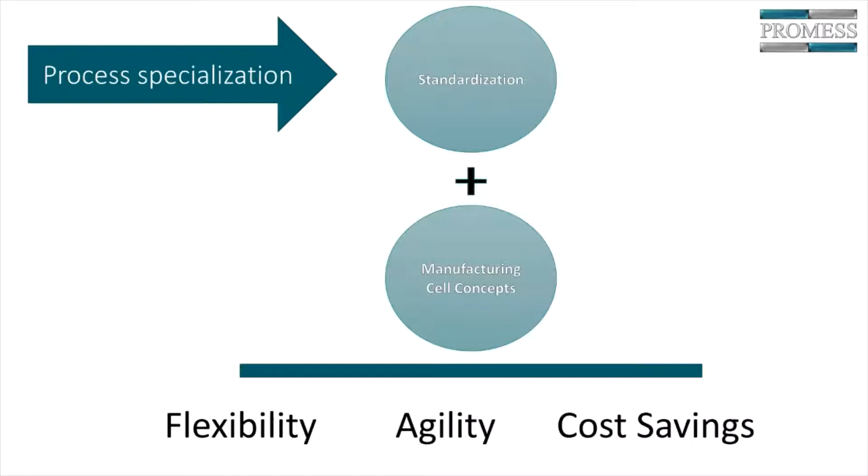Stephanie and I were talking about this, and we were talking about specialization. I'm one of these old guys who's been around a long time - I've been in this industry now for about 33 years. When I first started out, I was in the machining industry.

But we started talking about it, which made me think about a lecture I had from a professor named Leonard Peikoff. It was a lecture on Aristotle, talking about what a universal genius he was - a philosopher, mathematician, and inventor. Back in his day, they just called him the philosopher. Then you had Michelangelo and Leonardo da Vinci - sculptors and artists and mathematicians and inventors. They really were universal geniuses.

One of the students in that lecture asked, why is there no longer any universal geniuses? Why don't you see that? And Leonard Peikoff answered it very simply. He said the depth of knowledge is so broad and so deep in each subject that it's impossible nowadays to be a universal genius. His advice to this young student was to become a genius or an expert in one subject - that's difficult enough.

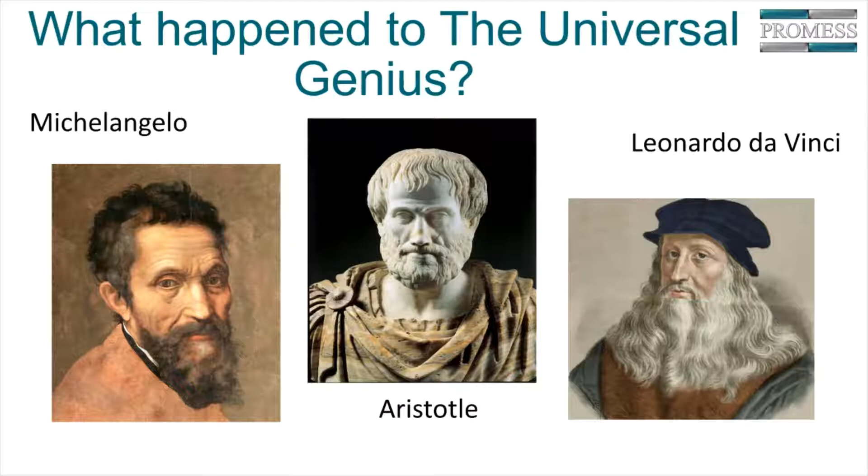And this analogy fits really well. I remember back in the late 80s, early 90s, a lot of machine builders were really expert in a lot of things, but slowly that has gone away because the technology has become so deep. We don't even call them builders anymore - most of the time now they're referred to as integrators. They're basically taking specialized technology and integrating it.

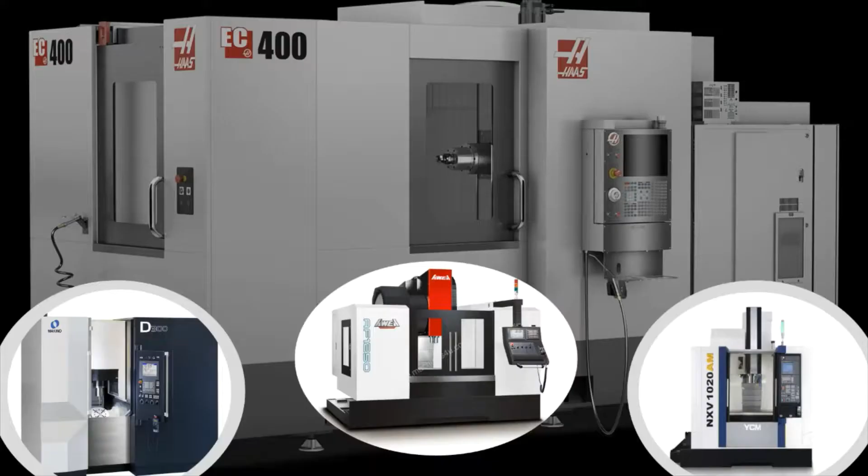That's true. And so with the advanced techniques, advanced controllers, advanced data requirements and so on, a lot of these technologies are being worked on as specializations by different companies. Again, I came from the machining industry early on, and in that industry, that story is to a large extent over.

When I was first working in the machining industry, there were a lot of custom machines, transfer lines, dial machines. You would have a part to make, and a machine builder would create a transfer line or dial machine that would make 2,000 parts a shift, with really high quality and work really well. But when flexibility and other things were needed, machining centers started to come on the scene and were being used more and more.

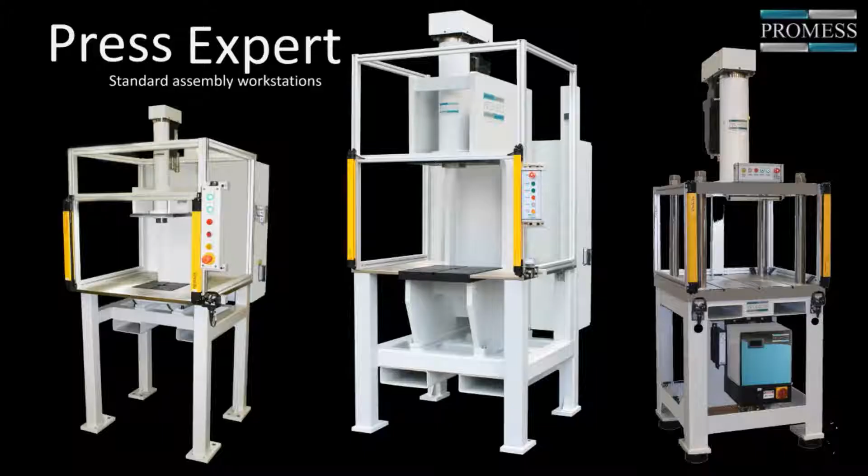Now I'm a little bit out of that industry - I work more in the assembly industry now than the machining area - but I don't know a manufacturer of machining lines anymore. I can't think of any; it used to be Lamb, Huller Hille, Cross, and all these guys. Machining centers and standard equipment have taken over. So in the machining industry, it's really gone that direction, and in the assembly industry, we're moving that way too. Promess is a manufacturer of servo electric presses - we've been doing this for about 30 years.

We have quite a number of standard solutions, but more and more we're supplying workstations or press modules, and we have a variety of them, both for press and torque. These modules can be tooled up to do a lot of applications. We go down from ounces to hundreds of thousands of pounds, but it's moving in that specialization direction that we've already seen with machining centers in the machining environment.

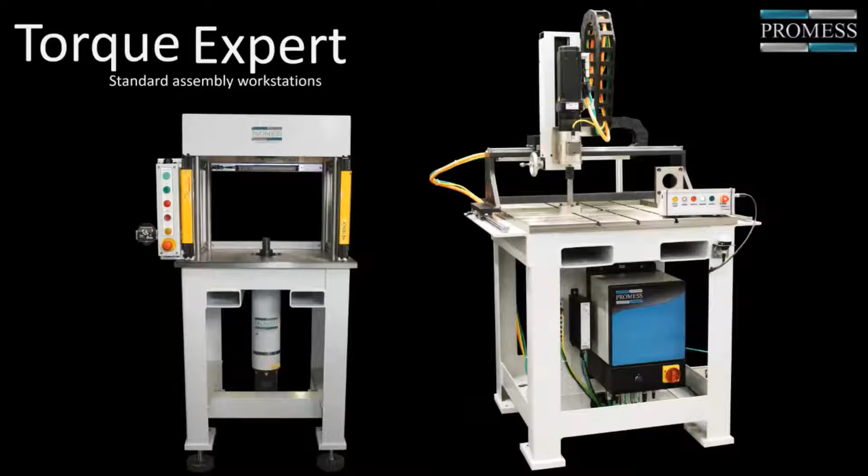The technology moves so quickly, it's difficult to keep up on everything that goes into an assembly process. You have special software, special data acquisition, the interfaces, what do you do with the data, and just the knowledge of the machines, the controls, and the process has gotten so deep.

Promess also does torquing. What we're really good at is assembly presses and torque testing systems, and that is our expertise. So we're coming up with standard solutions, but we're not the only ones.

We have an example here of leak testing. There's a company, we're friends with them, CTS, Cincinnati Test Systems, and they do a variety of things, but leak testing is what they do very, very well. They have some standard solutions for leak testing.

We do work with, we're involved in lines with companies that do other types of fastening and forming and orbital forming and welding, and it's the same story. They're standardizing their equipment more and more.

It's the 80-20 rule. Whoever came up with the 80-20 rule was a genius. It applies so often, and I think it fits here. 20% of applications may need something exotic where they need a custom station or custom machine built. But about 80% of the time, you can take a standard machine and tool it up. Your tooling and your fixturing and stuff is special, but the machine itself can be standard.

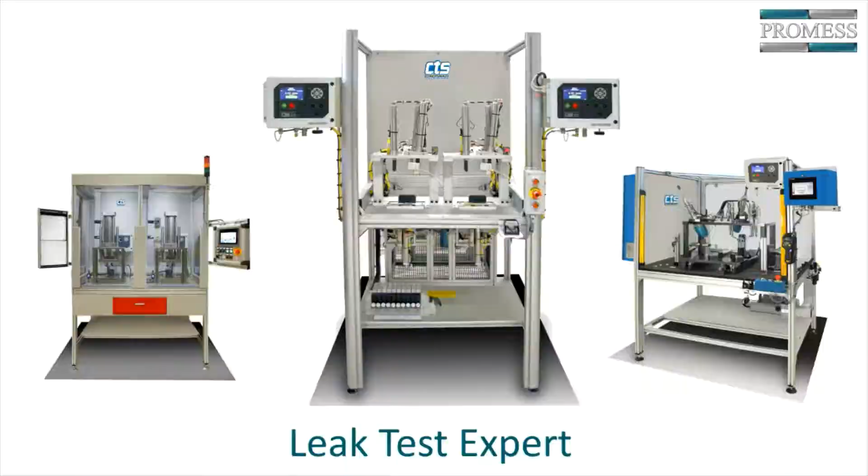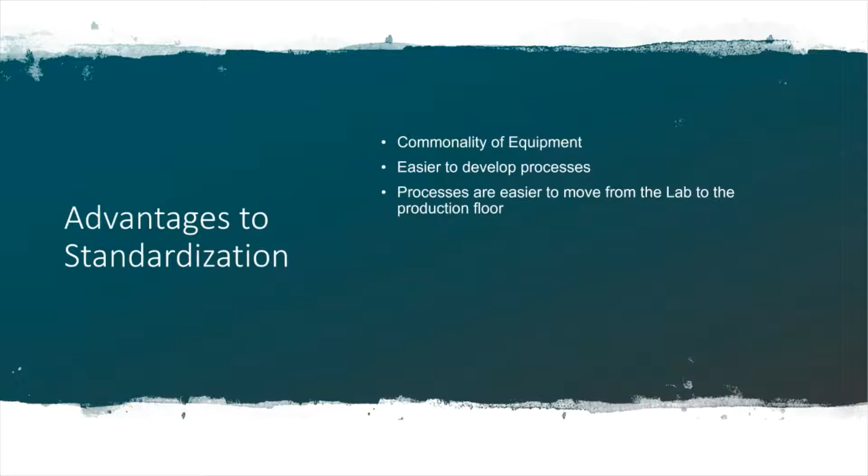Right, and there's a good reason for that, when we talk about all the advantages. Commonality of equipment, of course, makes it easier to develop processes. The processes are easier to move from the lab to the production floor. If you're using standard equipment in your pre-production lab, you can move it to the production floor much easier, and equipment lead time is shorter.

Repurposing stations is easier. That's one of the crazy things. In the old days, going back to the machining analogy, you would have a transfer line or a dial machine that was built to make a specific part or a specific family of parts. And when those parts were at end of life, that was a whole other problem, which we're going to talk about. But the transfer line was ultimately scrapped normally. When they switched the machining to machining centers, those machines are utilized again.

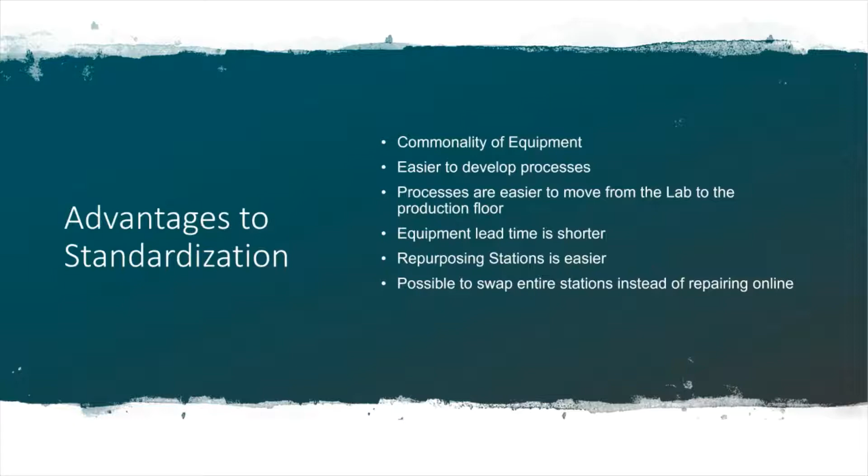They're repurposed, and it's a huge advantage to using standard equipment. It's possible to swap entire stations instead of repairing online. New part models can be more fully debugged in the lab. Again, if your lab equipment matches your production equipment, the transition from pre-production lab to production is much smoother, and low volume production can be done in a lab or in a smaller environment.

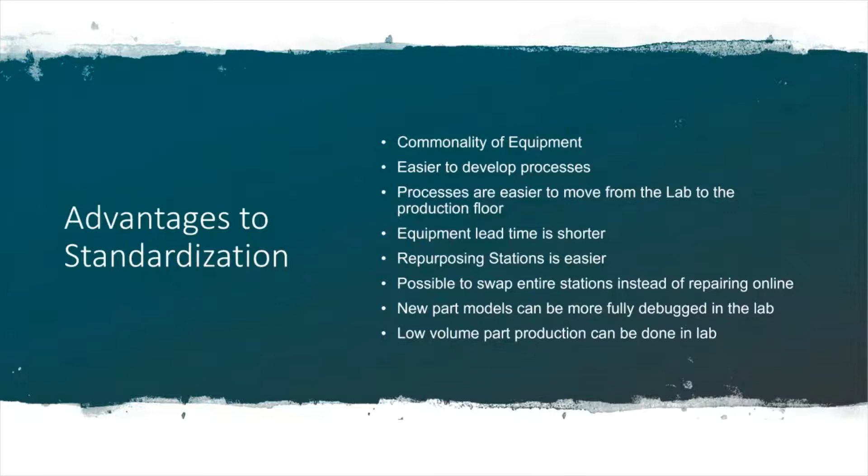So our main subject today is the trend towards specialization, the trend towards standardization, which we think is driven by specialization. We are going to be mixing in the assembly cell concept because the two go together so well, so we're going to be talking a lot about that.

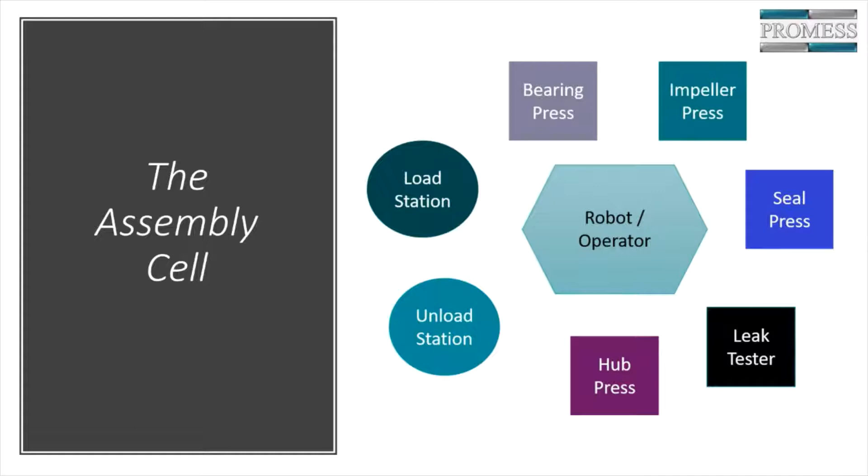Using a manufacturing cell concept, you have reduced setup time. Coincidentally, standardization gives you the same exact advantage. Improved machine utilization, ramping production up and down is easier. Station repairs are easier and don't take production completely down, and it can make downsizing production and down to service parts easier too. All 5 of these are an advantage.

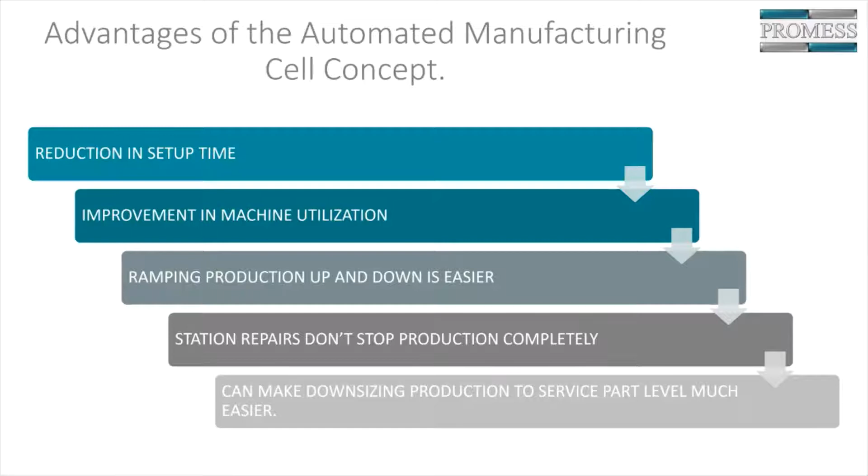This is just a partial list of the advantages of the manufacturing cell concept, but all 5 are also with standardization. That's the reason why a lot of people have gone to manufacturing cells, because you have so many of the common benefits as in standardization, which is why we're firm believers that when you combine the two, you're really looking at the best of both worlds. You end up with a very powerful, agile, flexible setup, and you save money in the long run for sure.

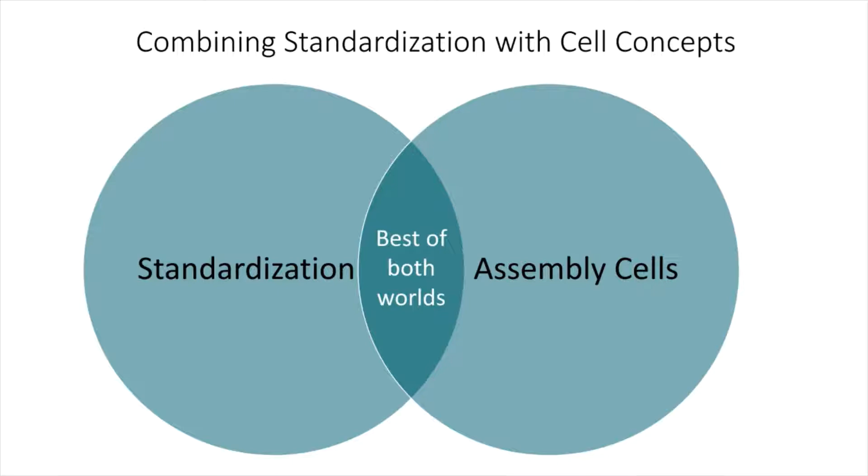Standardization can happen without the assembly cell, but we're strong believers that the combination of the two is really powerful. So to really bring that home, we wanted to look at an example of a water pump assembly. What we're going to do is compare and contrast a traditional transfer line with custom stations versus an assembly cell with standard stations.

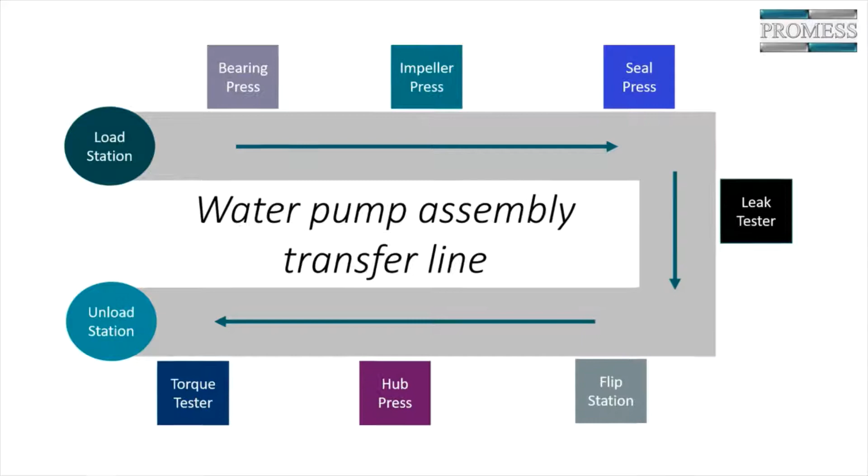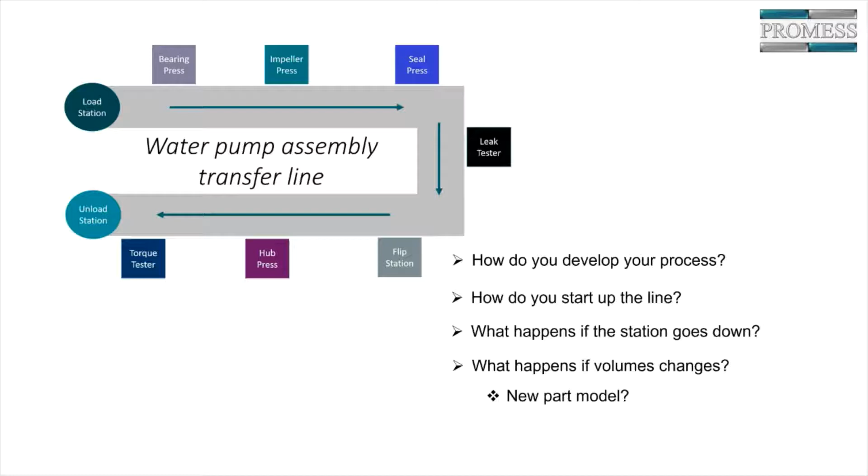A few things we're going to look at: how do you develop your process, and how is the development different between the transfer line and the assembly cell? What's it like when you start up the line? There's really a difference between the two. And what line hasn't had a station go down? What about when your volumes change up or down, you get a new part model, how do you handle that? And of course, service parts—there's a big difference between those two.

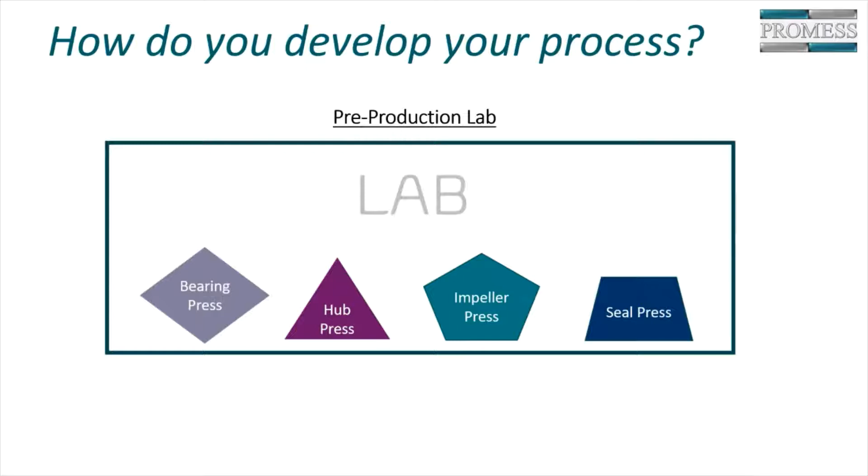So let's start with developing your process. With a traditional transfer line, hard automation, most of the time the development's done in a pre-production lab. But very distinctly, the equipment used in that lab is quite different than the equipment used on the line. This is where you run into a lot of problems.

If you spend a lot of time going from different plants, which I did for 25 years, some of the labs are fairly well equipped, generally not with the same equipment they're using out on the production floor though. So any of the development doesn't translate directly. You can figure out a lot of things, but you can't figure it out 100%.

Some of the pre-production labs are using World War II vintage equipment and arbor presses. On the production equipment, they're going to use an electric press, and in their lab they're doing their testing with an arbor press. It's very difficult to really prove out a process that way.

And the problem with that is that to prove out the process, you're not going to get to do that until the transfer line is completely built. That takes time and energy. Many times we even find out that the components aren't sized properly, so you have a press or unit that's too small for the application.

Or how often have you been working on a project and the machine is built, you're running cycles, you're getting a 30-second cycle time, and they expected 20 seconds, so you try to figure out how to get 10 more seconds out of it—because it was never actually debugged on production-type equipment. The cycle time wasn't thought through during that part of the process. You're using best guess at that point.

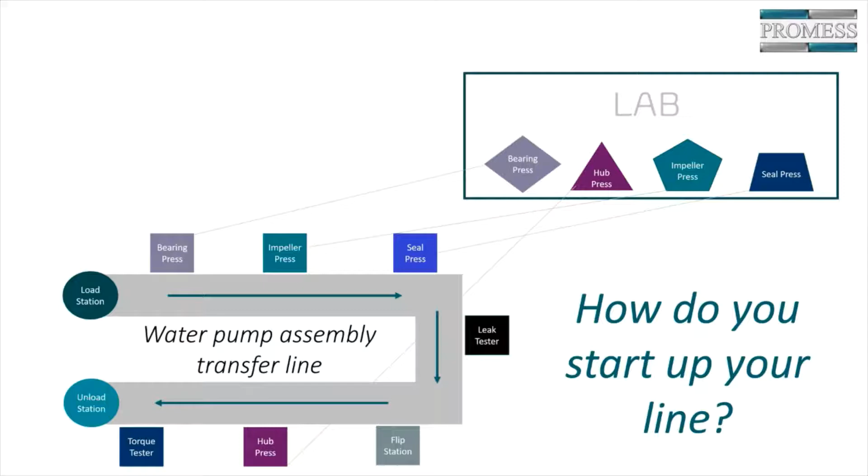So we're also part of our advocacy here for the pre-production lab guys—we're on your side. You need to have the standard equipment which is used in the manufacturing area in the lab.

Once you are using that equipment in the lab, most of your process is debugged in that pre-production lab. You're familiar, you know you have the right-sized equipment. So once you get that cell to your floor, you have very little process development that needs to be done after that.

It's apples to apples. If your lab equipment matches your production floor equipment, it'll slide right in. You can develop the processes really 100% before the production equipment is built.

Any transfer line or dial machine I've ever worked on, the final process development is either done on the builder's floor in a rush because the machine's late, or the machine is shipped and then it's done on the end user's floor. But now your station is all debugged, it's ready, it's on your floor—but guess what?

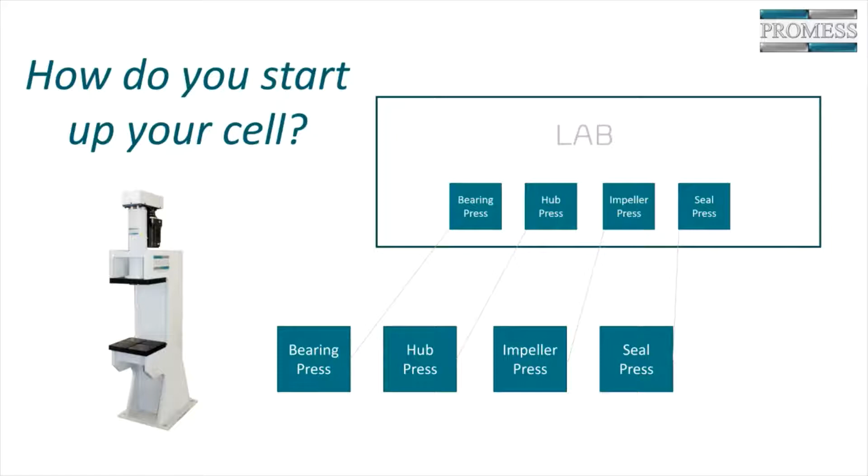One of them went down. Your whole line here is only as strong as your weakest link. And right now, according to this example, your bearing press is down.

A custom station means specialized knowledge. So if not every person on your maintenance team understands that specific station, you either have to wait until that person comes in, or try to find another way to take care of this. But right now, because this is all linear, nothing on this transfer line is running—every station is down, every station behind that station, or ahead of that station.

Is that behind or ahead? After that station—I'll use the word after.

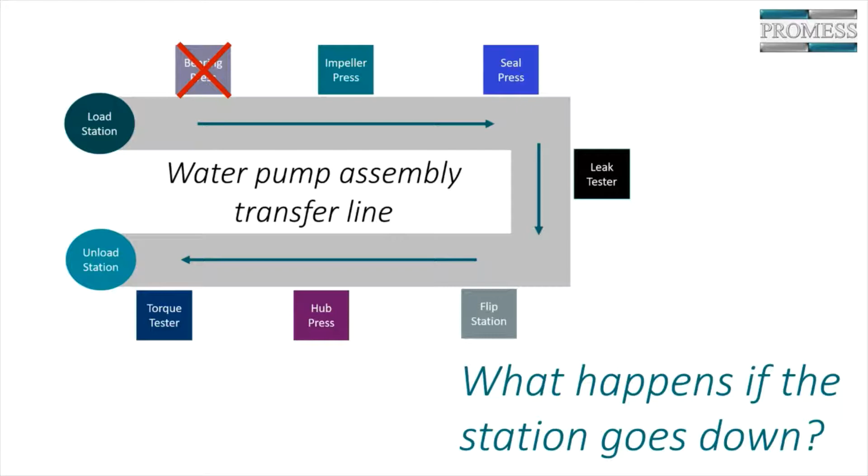When you look at an assembly cell that's using standard equipment, because it's standard equipment, there's more common knowledge and shorter downtime. The actual repair should be quicker. And the other thing with standardized equipment is generally it's simpler. The idea is to have a simpler station rather than a very complex custom station, so it should be able to be brought up a lot quicker.

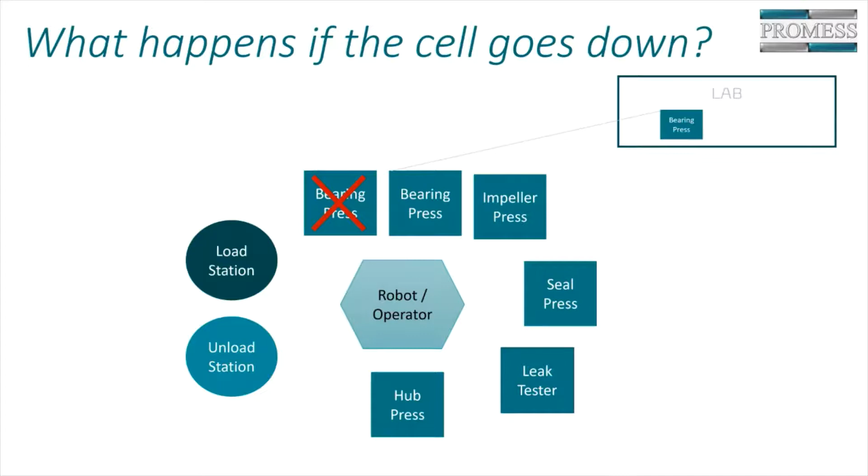You also have standard spare parts, so you don't have to keep a ton of specialized spare parts. You could potentially have a whole spare station. So if a station needs to be rebuilt or something's going on with it where it's going to take a few days, you can forklift in a complete new station, swap the tooling over, swap the programs, and you're up and running. Right, which is ideal.

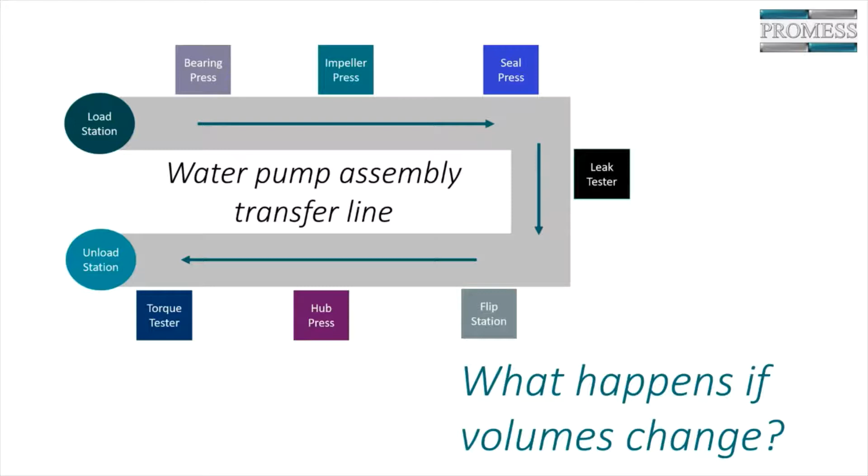Then there's the volume changes. We know this happens in the field. This line, for instance, is designed to run 2,000 parts a day, but now you need 2,500 parts a day. Floor space is a premium, and adding a new transfer line for just 500 additional parts isn't economical. It's not a simple thing to do.

Generally you have one or two bottleneck stations. 75% of your stations could do 2,500 parts a day, but maybe the bearing press can't. So you can add a second bearing press station in, but on hard automation it's not an easy task to add in a station. Where if you have a cell, you just drop in another station.

So on this example, if we were trying to add the bearing press because we want to increase production, we have to take the whole line down. Well, that's illogical. We're trying to increase it, not decrease.

With the assembly cell, we can just simply add the bottleneck station right here and then change slightly the robot so that it knows to use both stations, and then you can get up and running. In the meantime, you're still using the original station. You can prepare that new station offline, wheel it in, and it takes a half a day to get that station up and running because you've got it all set up offline.

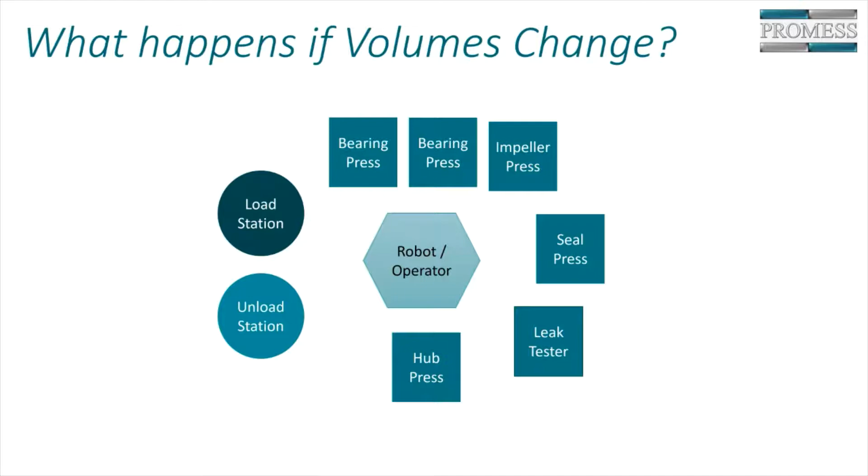And then if you do need to double the amount of production that you have, you can add another cell. These cells tend to be smaller in size and take up less floor space than the traditional transfer line.

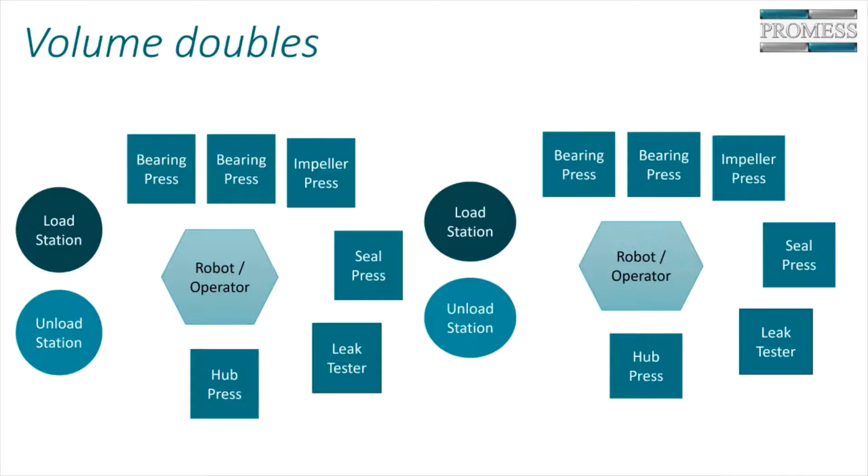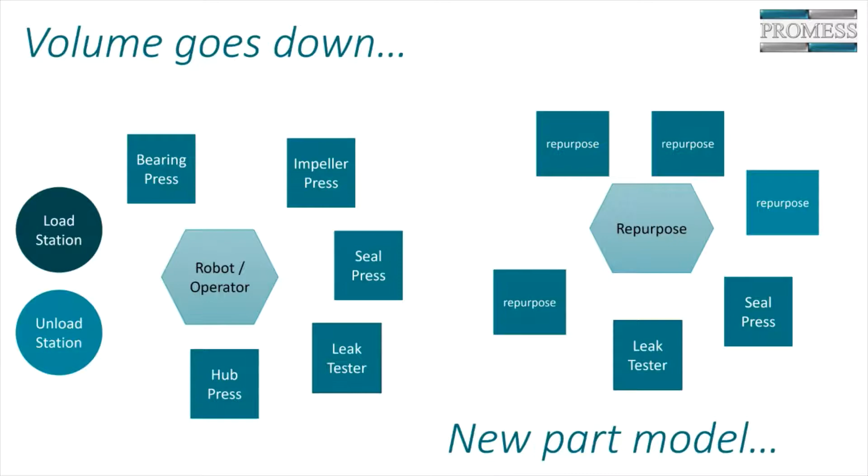If your volume goes down, now that second cell you had, you can repurpose for either a new part model or spare parts for a different station. It's back to the machining center analogy: you bring in machining centers if you need more production, and when you don't need them anymore, you take them off. You're making water pumps and your water pump production's going down, but your compressor production's going up, so you move the equipment over to the compressor production area. And then if you no longer need the bottleneck station, you can remove that one as well.

One thing with the whole ramping up and down, there's a life cycle to a part. You build a machine that can do 2,000 parts a day, but you really only need 500 parts a day in the beginning, and you've got to get this whole line up and running so you can do 500 parts a day. Usually the machine is limping along getting 500 parts a day off of it, and you're working at it because it can't do 2,000 yet. Over a period of time you got to get it up to 2,000, and then hopefully your business takes off and you need 2,500 or 3,000, and now you've got work to do to get there.

But as the production changes, a new model comes out or something, you need to start ramping down. On a transfer line, if you only need to make 1,000 parts a day, you still got to keep that whole transfer line maintained and up and running even though it can do 2,000 parts a day. But with the cell technology, with standardized equipment, downsizing is easy, and you're saving a lot of floor space. The real big problem is that part is totally out of normal production, and now you're going to service parts—how do you handle that?

Right, and we have customers who have kept a line on their floor, taking up space simply to run 500 parts a month. We've worked with customers where they call us and tell us, we run this machine 2 days a month, and I don't want to put money into it, but it's down. Do you have some used equipment? Do you have a used controller?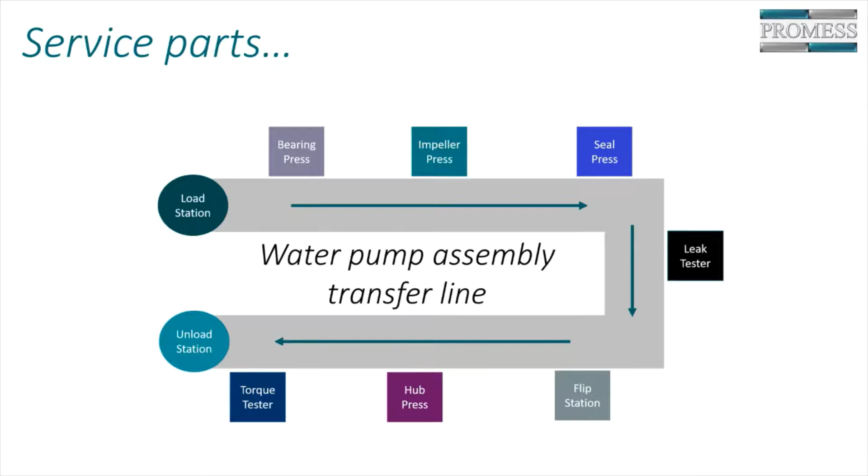Because they're keeping a transfer line that is old up and running to run it 2 days a month. Right, and floor space is valuable. Floor space is money, and you have to wonder, is that floor space they're using economical? Very often they'll outsource the service parts. They'll find a company that will build their service parts, but they ship that company the entire transfer line or the entire piece of equipment, again designed to make 2,000 parts a day because they need to make 500 parts a week on it.

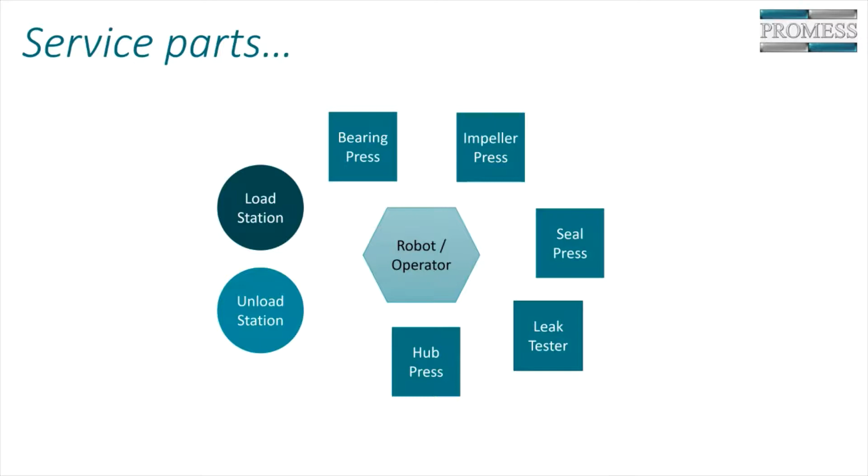So let's look at what we could do using an assembly cell and standard parts. Okay, so here's our assembly cell, and now we just need to service the parts. You can break that cell up. You can repurpose a majority of that cell and just take the 2 stations that are needed.

Since you're using standard equipment, and this is really low volume, you could set up and have your seal press be tooled up to run your bearings, then change the tooling and have it run the whole process all the way through. You only need 1 press station to run all 4 press operations because it's so low volume. You tool it up, run 500 parts of one, run 2,000 parts of whatever, and swap it around. And we have many customers that do this. This is not unusual.

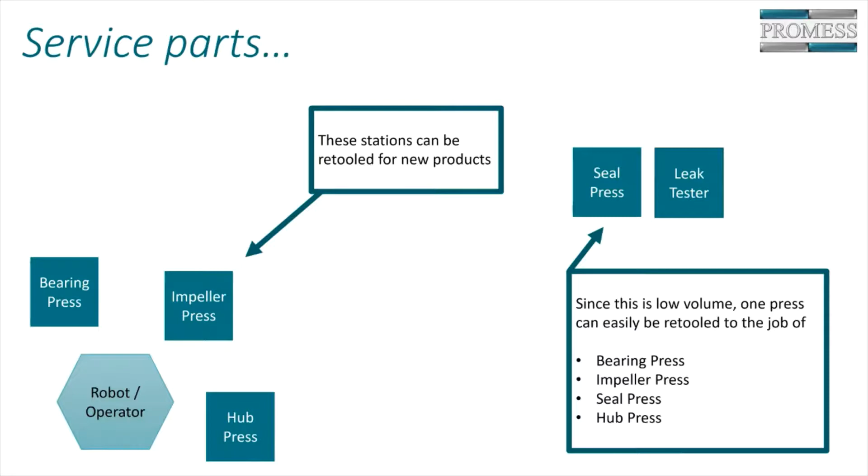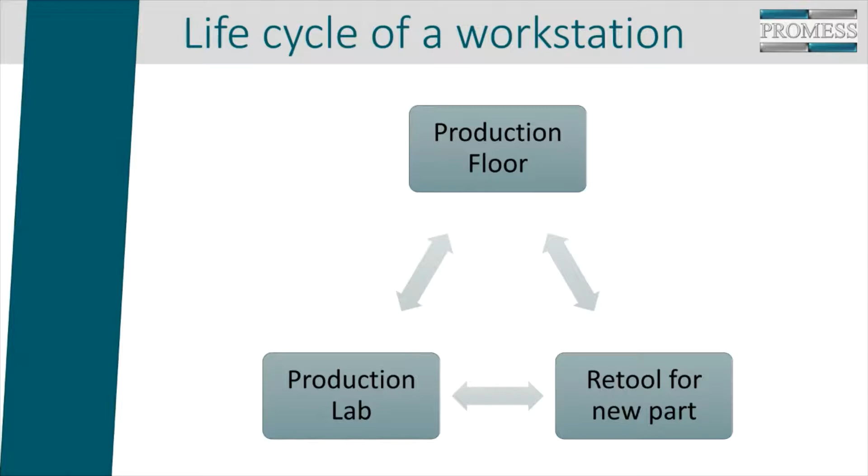And that's really, we're talking here, but if you look at the life cycle of a standardized workstation like this, it can go from the production floor to the production lab. It can retool for a new part. It just has a lot of flexibility and agility. And we can speak about this because we do this every day.

At Promess, we have what we call our PDC, or Process Development Center, and we have our standard equipment. Rarely a day goes by that we don't have someone send us parts, or they bring in parts. They'll bring in some tooling, or we'll put something together for them, and it takes anywhere from an hour to a half a day to set up to run a part - a brand new part we've never seen before. By the time we set up the tooling, program it, and run a few cycles, they'll normally send us 5 to 100 parts, and we run it for them and send the data back, or they're here and we're helping them develop their process.

I think the point, though, with the standard equipment is you can change over to a completely new part. Of course, you have to redesign your tooling and fixturing, so there's pre-work there, but once that work is done, the machine can be changed over quite quickly.

If you have this kind of equipment in your pre-production lab - which is actually our process development center - it's really interesting sometimes how it works. We'll have customers coming to us multiple times as they're testing, setting up, and having us help them with their process. And the light bulb goes off, and they're like, why am I coming to you? I need one of these in my lab. That's a lot of times how we start our relationship with customers - getting one of these systems in their lab. It's something we do every day.

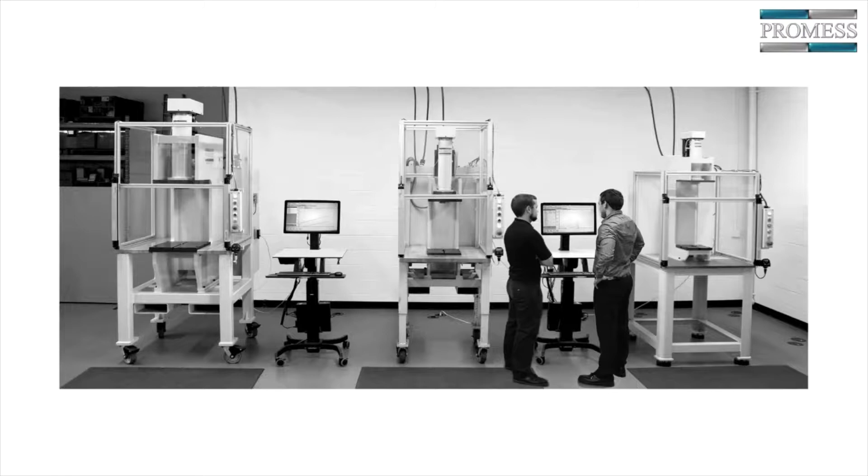All right, so we told you in the beginning that we were going to show you how you can cut your production costs.

So first, standard equipment costs less than custom equipment, period. It just does, and the more standard, the more cost savings. The more special, obviously it costs - there's a cost to customization. Standard machines can be repurposed, and this is really key when you think about it, because if you have 2 projects using standard equipment, the cost of that equipment can be utilized over several projects. Now you're amortizing it over several projects, and the accounting guys know all the special words for that, but it is one of the key advantages.

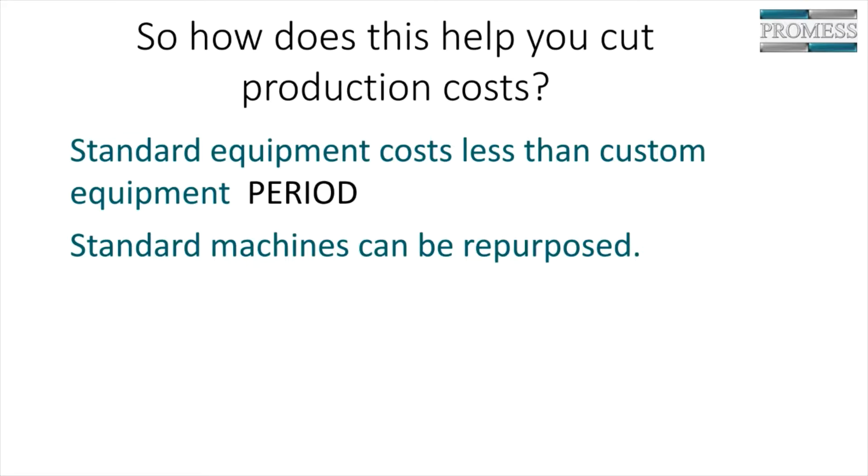Time is money. We hear this all the time, we've grown up hearing that. Less complexity means less startup time. Standard means less downtime. When you have standard equipment, the knowledge is known throughout, and you have standard spare parts on your floor. Everything becomes simpler with standards, and simplicity saves time, saves money.

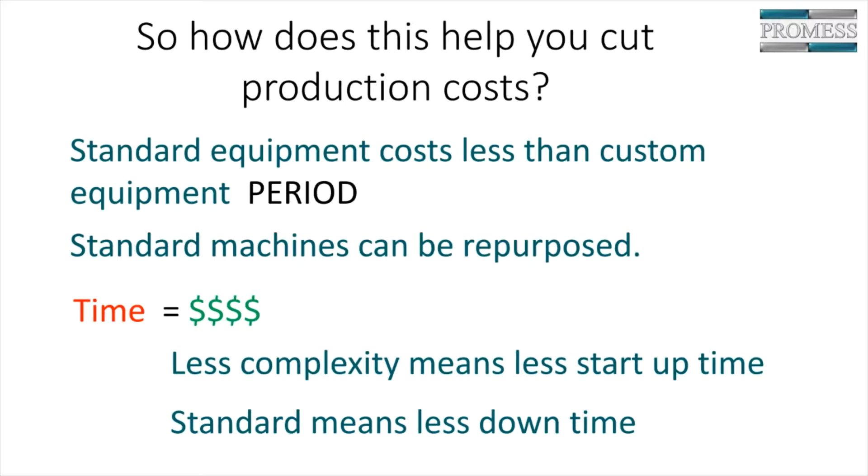So let's field some questions. Dane is supposed to send us some questions, I think. Dane is on. I don't know if he's going to send us any questions.

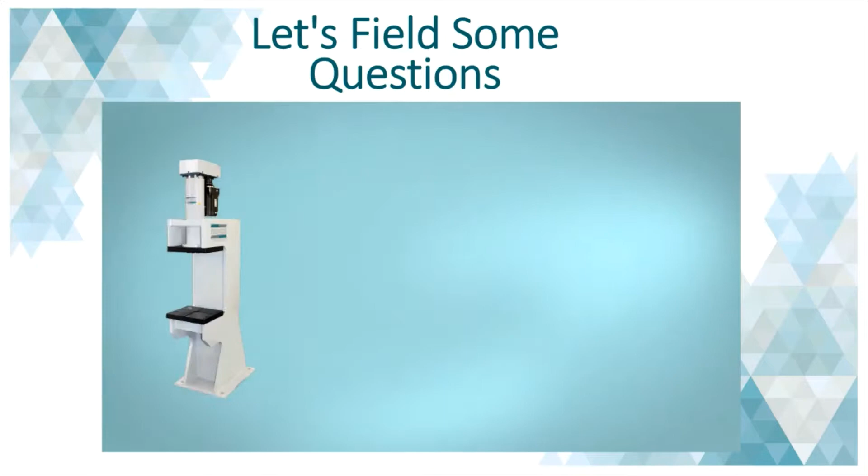The first question: my press application requires over 100,000 pounds. Does Promess offer a standard solution at this force level? Actually, we do. We have a standard solution up to currently 400,000 pounds. To be honest with you, we've only built the 200,000 pound one. Our 400,000 pound solution is only on paper, but we do have a solution on paper. But 200,000 pounds and down, we've built quite a few. So, yeah, 100,000 pounds is not a problem.

My standard would need to have the flexibility to either be manually loaded or robot loaded. How do I handle this? Really, there's not a lot of difference between manually loaded and robot loaded. The biggest difference is safety, is how do you handle the safety. Manually loaded, you've got guarding, light curtains, doors — you have to take safety into account.

Robot loaded, if it's never going to be manually loaded, and especially if you're not even talking about a collaborative robot — if you're talking about a standard robot that has to have a cage around it — then you don't need any kind of safety equipment around the press, because if there's a cage around the press and the robot, then you can take away the safety equipment. But besides the safety aspect, there's not a lot of differences. The only other thing is we have some synergistic control with robot controllers, so talking to robots via our control is standardized also. We do have applications where customers have the exact same equipment being loaded via robot, and at times manually. Again, it comes down to the safety — the guarding, the light curtains — things that have to be on it for the manual operation.

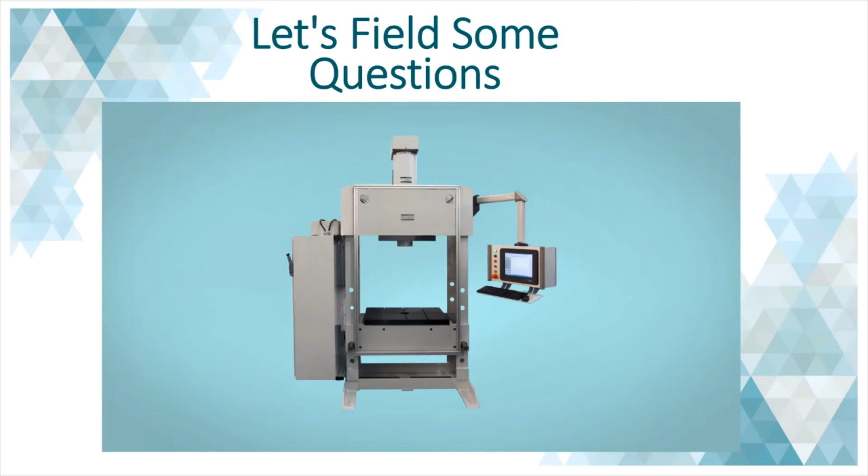But we do work with customers to develop a standard for them, because the big thing is the more you can work with an industry standard - I'll call it a Promess standard - there's a cost savings there for sure. But there's tons of advantages even if you go internal to your manufacturing needs, and make a standard for your processes and stick with that standard. You don't get all the advantages of an industry standard with a special standard, if you will, but you still gain a lot of those benefits.

So some processes require a little different twist, but if you can standardize that little different twist, that's perfect. Like I said, the 80-20 rule is amazingly repeatable across different things. We do find 20% of the time there'll be something kind of exotic about the process, and then it's more difficult to standardize.

Okay, so those are all the questions. Trying to get back to... I have to apologize to Stephanie, she kept trying to edge in a word and I talked too much. Oh, it's fine, you're a wealth of knowledge.